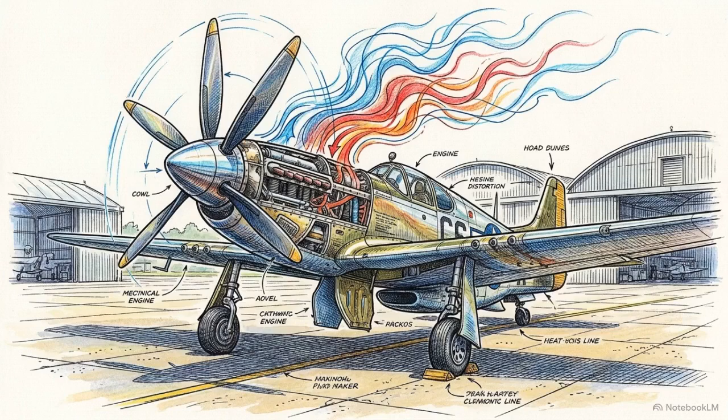If you have ever spent time near a small airport, you know the sound of a standard piston airplane, a low, rhythmic, sputtering rumble. But occasionally, an airplane with propellers will taxi by producing the distinct, high-pitched whine of a commercial airliner. It is a striking contrast that leaves many people wondering why some propeller planes sound exactly like jets.

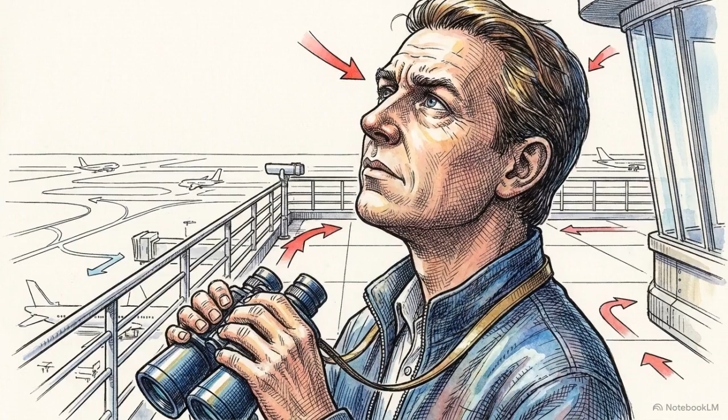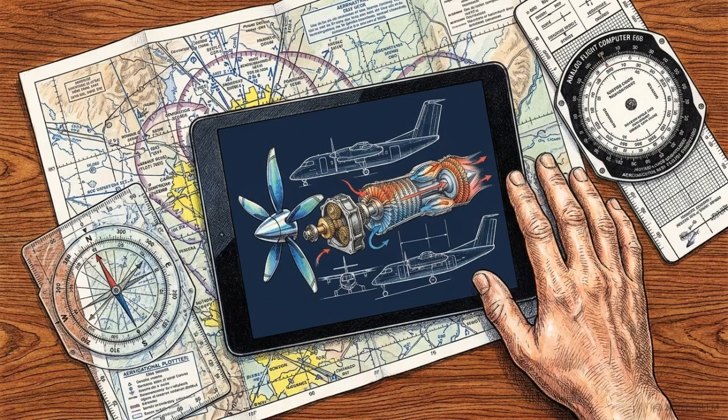This engine operates as a two-part team. You have a powerful jet engine core generating massive rotational energy, and it is paired with a traditional propeller that uses all that twisting energy to bite into the air and pull the airplane forward.

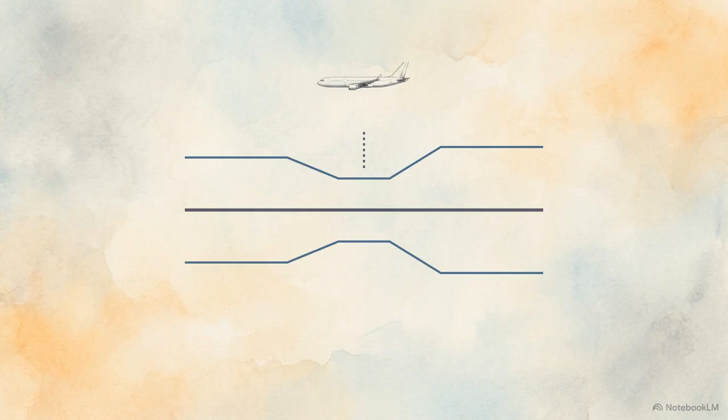Internally, the core of a turboprop, the gas generator, functions exactly like the giant jet engines you see on passenger airliners. It breathes in outside air, squeezes it down tightly, and ignites it with fuel to create a continuous, roaring fire. On a standard passenger jet, that fire shoots straight out the back to provide thrust.

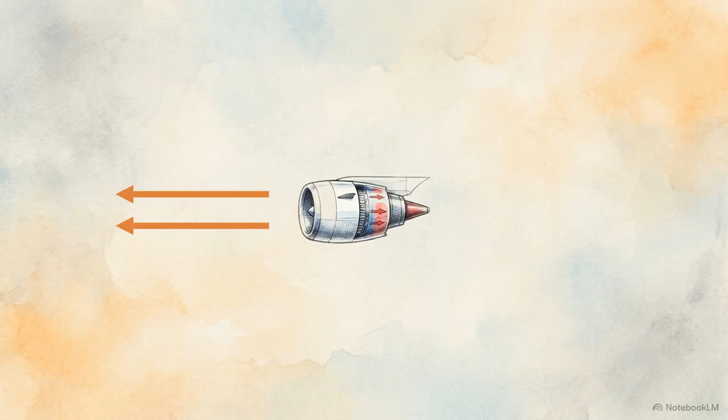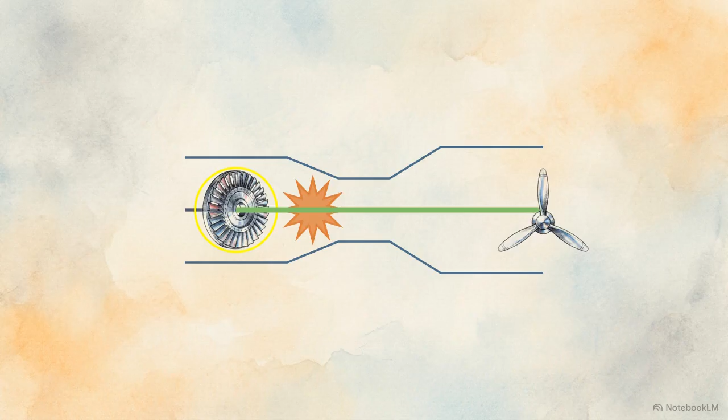But a turboprop features extra, specialized turbine blades sitting right in the path of that fire. Their entire job is to capture that energy and redirect it forward toward the propeller. By combining these elements, a turboprop gives pilots the reliability of a modern jet engine while maintaining the efficiency of a propeller at lower altitudes and slower speeds.

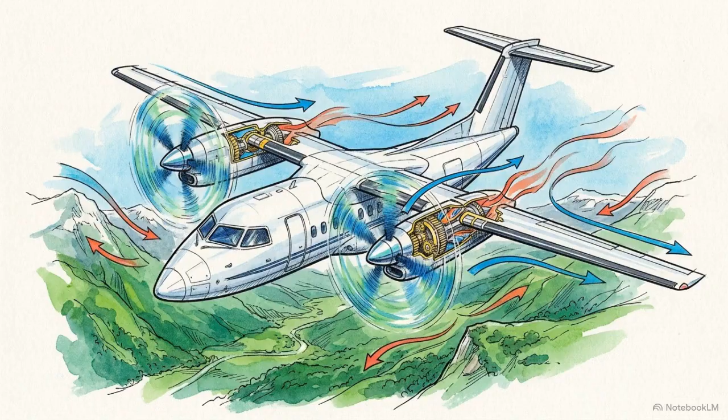To see how this power is managed, we can look at the four major assemblies that make up a typical turboprop engine. The first piece is the power section. This is the primary gas generator that takes in air, ignites fuel, and creates the expanding gas that provides all the raw energy for the aircraft.

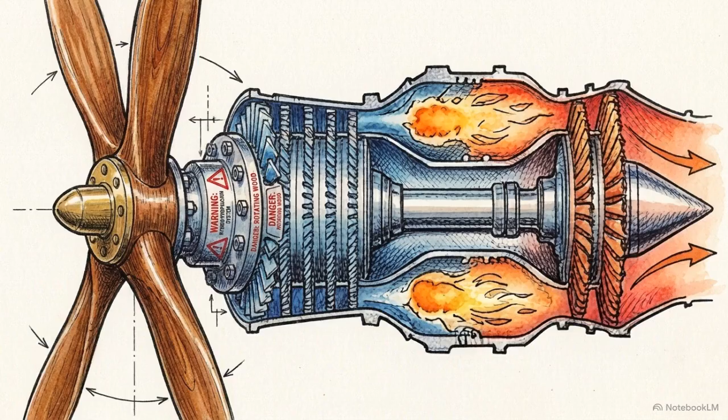But this creates a mechanical challenge. That jet core is spinning at tens of thousands of revolutions per minute. If you attached a propeller directly to something spinning that fast, the tips of the blades would break the sound barrier, and the propeller would likely shatter.

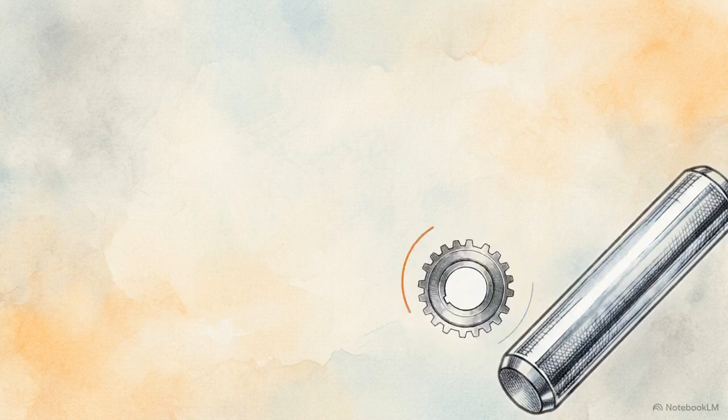To solve this, the engine uses a reduction gearbox. Think of this like putting a car transmission into first gear. It takes the extremely fast spin of the jet core and steps it down, turning that speed into a slower, incredibly strong twisting force that the propeller can actually handle.

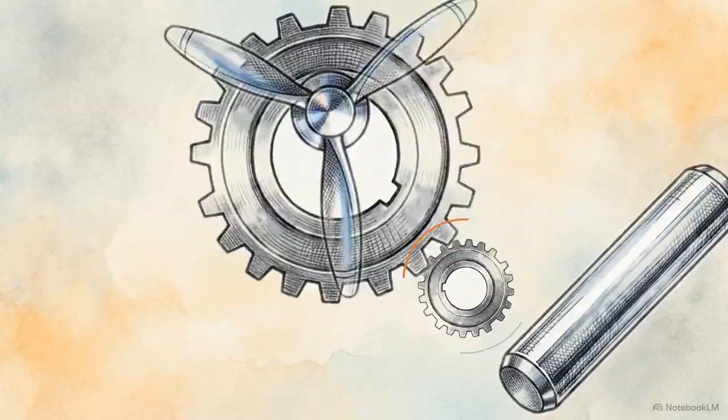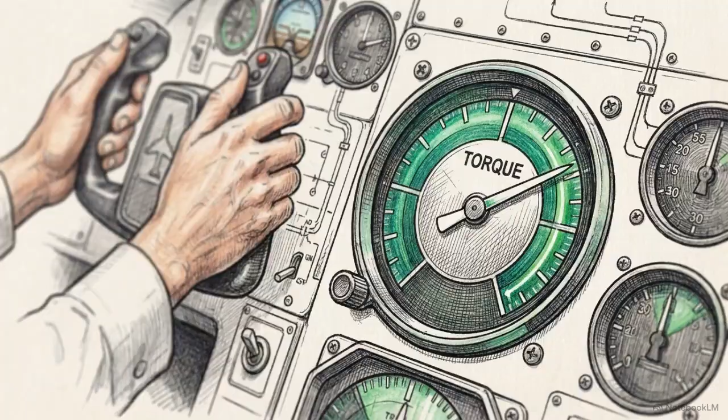To keep everything running smoothly, the torque meter measures how much twisting force is being sent to the propeller, so the pilot can monitor engine performance. Nearby, the accessory drive uses the engine's rotation to spin the internal pumps and generators that provide the plane with its electricity and hydraulic pressure. Without the reduction gearbox translating that raw speed into strength, the power of the gas generator would be completely unusable.

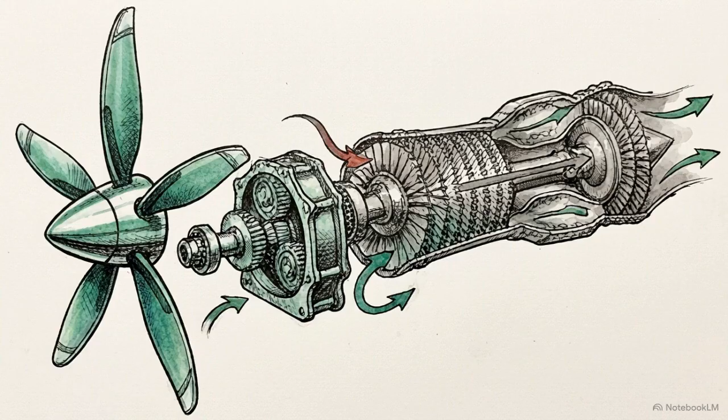With the speed managed, we have to look at how that twisting force actually travels from the fiery jet core up to the gearbox. In aviation, there are two primary ways to make that connection. The first is the fixed turbine design.

As you can see here, a solid metal shaft physically locks the rear turbine wheel and the propeller together. It works like a bicycle chain connecting your pedals directly to the back tire. They are physically linked and must spin as one.

The second design is the free turbine. In this setup, there is no mechanical link connecting the jet core to the propeller at all. There is no shaft or physical connection joining the two halves of the engine.

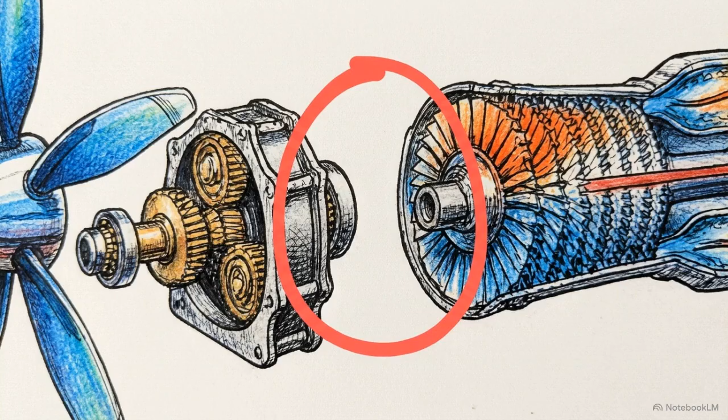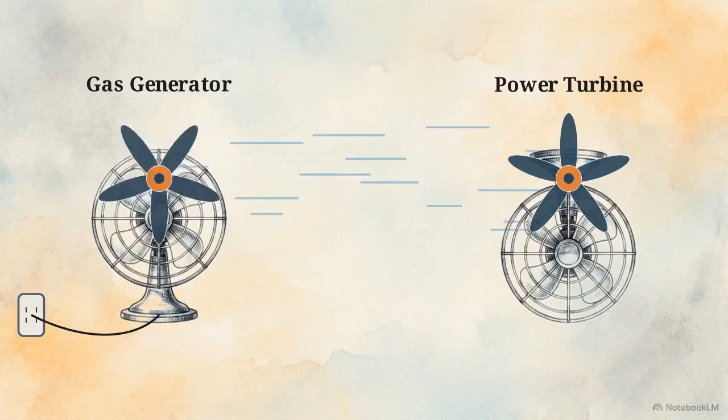You can visualize this using two desk fans. Imagine two fans facing each other, but only one is plugged in. When you turn the first fan on, it blows a strong breeze into the blades of the second fan, forcing the second fan to spin even though the two machines never touch.

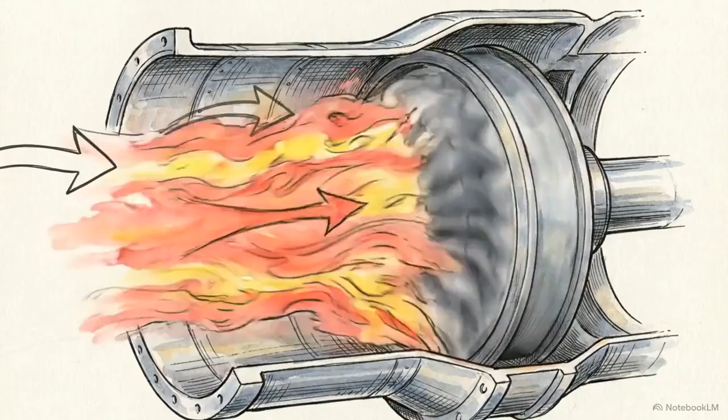A free turbine engine uses that air link. The jet core blows high-velocity exhaust gases across a completely separate set of blades, the free turbine, which then captures that wind to spin the propeller.

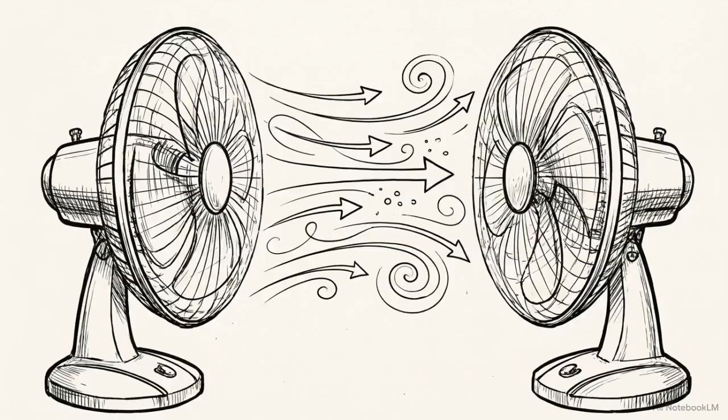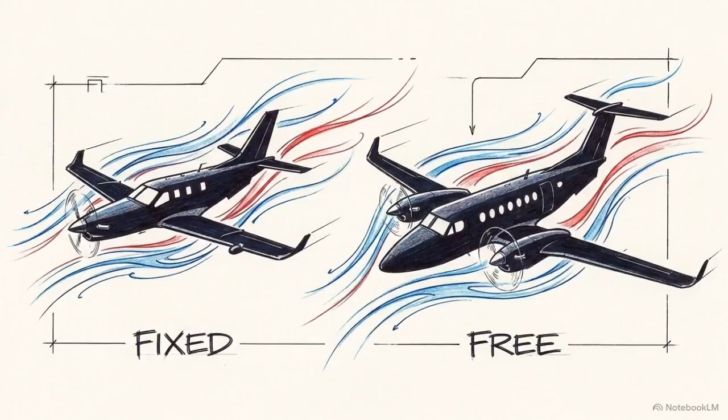While the aircraft's design determines which system is used, both are effective ways of capturing the energy of exhaust gas to do physical work. Now that we know how the turbines capture the energy from the gas, we have to look at what happens to that air once it finally exits the back of the engine.

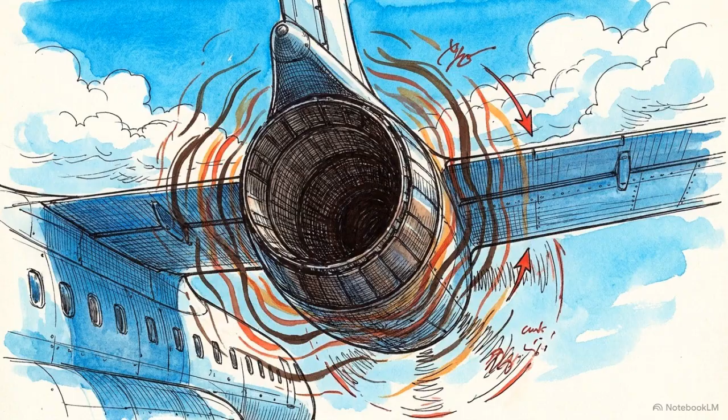A pure jet engine uses all of its exhaust to push the airplane forward, like a rocket. A turboprop, however, has already forced that air to do a lot of work spinning those internal turbines, which drains away most of its energy.

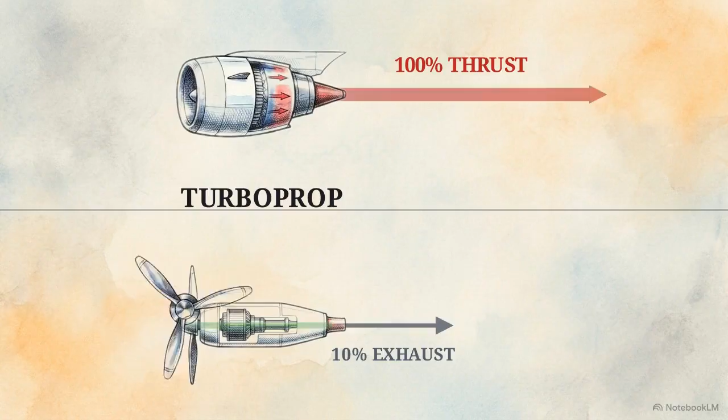This comparison shows the result. In a pure jet, the energy blasts out the back as thrust. But in a turboprop, the power is routed forward to the blades, leaving only a tiny amount of energy to exit the rear. This proves that the giant propeller is doing the actual heavy lifting for the aircraft.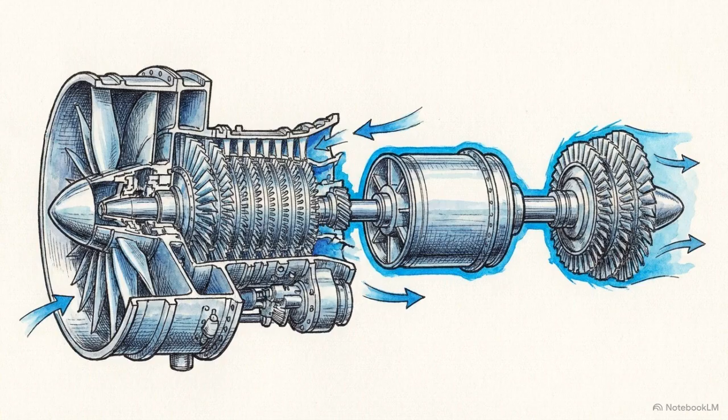You now understand the core of the turboprop. It relies on a high-speed gas core to create energy, a specialized turbine to capture it, and a gearbox to translate that power into propeller rotation.

Mastering aviation isn't about memorizing complex manuals. It is about understanding these mechanical concepts so you can feel confident every time you pre-flight an aircraft.